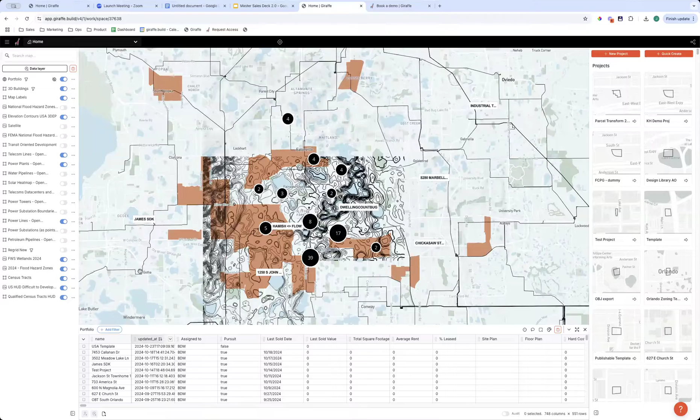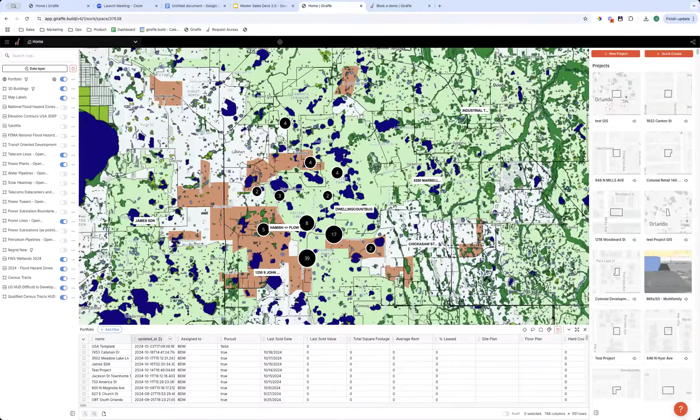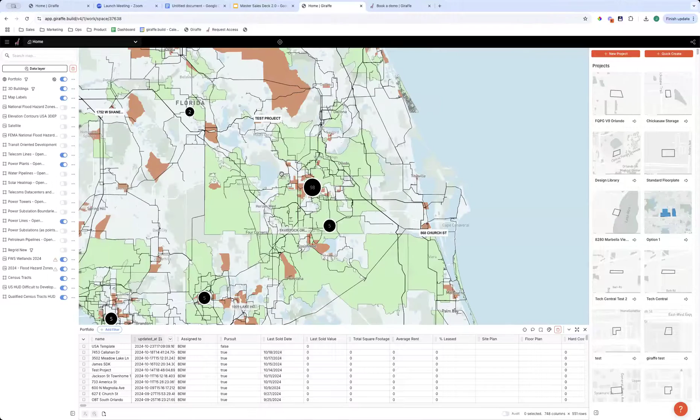And as you look at each of these data sets, they're sort of interesting from different vantage points. So contours at this level, not helpful. Let's get rid of it. But difficult to develop areas from HUD, that is very relevant at quite a zoomed out level. So unlike some other tools that are out there on the market, you want to be able to fluidly zoom in and out of any level. We want to be at the city level, at the country level, at the regional level, at the site level, kind of fluidly. We don't want to have to chop and change between them all. So let's turn some of these off.

Okay, so I just thought I'd point out for those that are in the US, we also work with a nationwide parcel aggregator. Now, this data set is not that relevant for folks that are working with great GIS data sets already, like parcel information for a lot of cities is public data. But it is worth just having a look at because it explains, I think nicely, how powerful the GIS tool sets within Giraffe can be.

So what I've just done there is I've added a layer called Regrid, and then I've focused the lens on that layer. So if you're following along and you want to do something similar on your side, do the same thing to the 3D buildings data set. So zoom in till you can see the 3D buildings, and then click the three dots, open lens control. And you can see now that I've opened lens control on the 3D buildings, the table down here is focused on the buildings data set. And I have columns, and as I hover over different rows, they're giving us some kind of information about what building we're talking about.

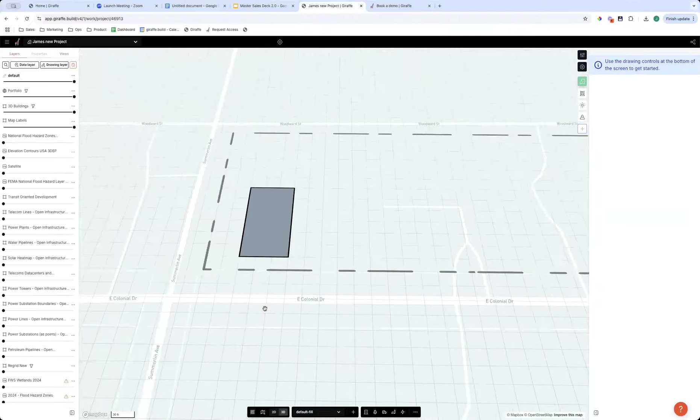Okay, so now we have a rectangle that's drawn to the grid. We like the look of the rectangle, but it's just a rectangle, right? We haven't gotten very far.

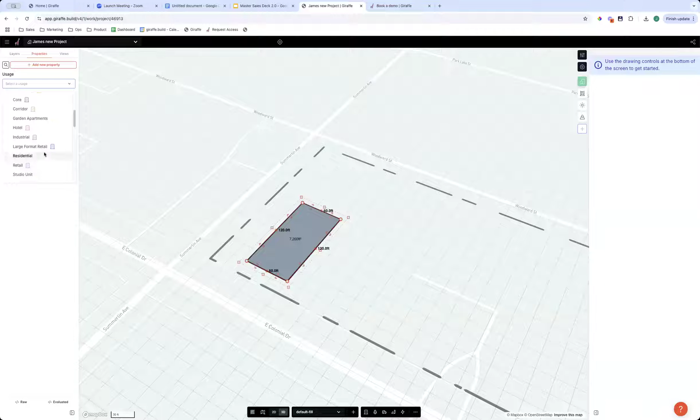So what I may want to do is assign a use. You can see up here on the left-hand side is a usage. Feel free to dig right through them. The residential one is a good place to start. You can see when I assign that residential use, it extrudes directly from the ground. It's a three-dimensional object, and I can now control its height based on number of levels. So that's an easy way to do it.

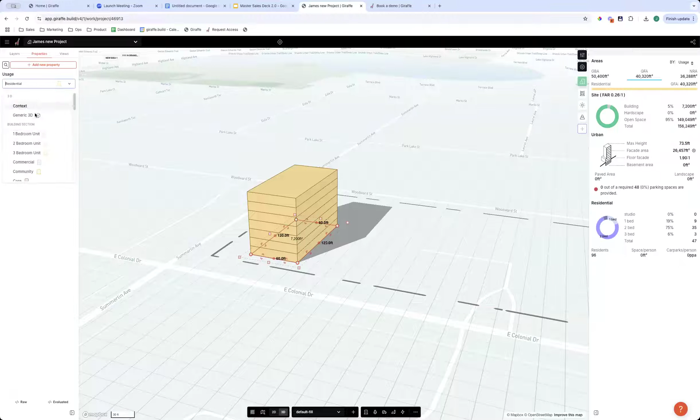And uses, there are all sorts of different uses. For instance, that's a built form type use. But if I'm a land planner, I may want to add a land planning use, in which case we want a different kind of use. We can come back to that as the demo progresses.

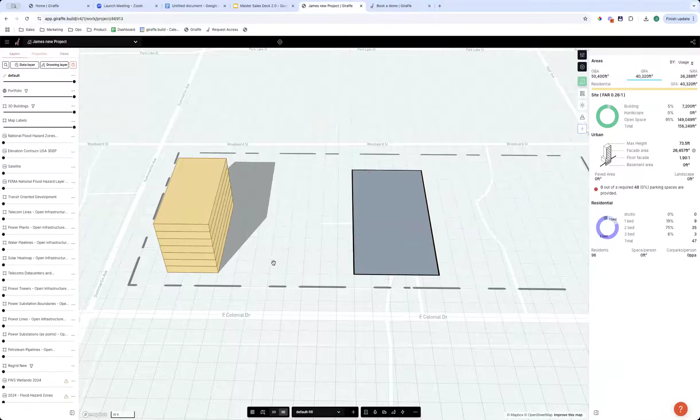Okay, so what's actually happening here? You can see as I've drawn the residential use, I've now got a ton of math on the right-hand side. I have a gross build, so clearly I've drawn with the external wall, the outside of the external wall here. I have gross floor area, so there's a factoring down that's occurring to go from gross build to gross floor. And then there's a net rentable, so there's a third efficiency to take us from gross build to net rentable. FAR is calculating dynamically.

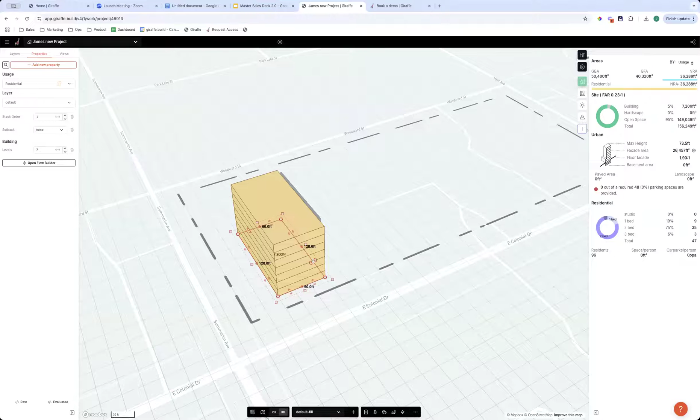We've got all these top level metrics that are really helpful for us being calculated dynamically. And you can watch FAR or max height, for instance, as I grab this polygon and stretch it over the site. That's all dynamic and comes with us.

Okay, so what we want to look at though is where are those assumptions hiding? Who's in control of the assumptions? And the short answer is you are. You want to be in control. Makes way more sense for you to be in control than Giraffe. So every time we talk about a use, it's going to be up here on the top right in the usage table. And this is where we can get crazy.

Think of this like the ingredients panel for your MasterChef recipe. So we're under residential right now, and you can see residential is fairly straightforward. It's a building. It has an efficiency to go from gross to gross floor, and another efficiency to go from gross build to net internal or saleable area, floor to floor, which is giving us these height metrics per level.

And then importantly, it has dwelling calcs. These dwelling calculations, again, are just purely mathematical at this point. There's no visualization, although we will get there, which has the mathematical representation of the dwelling sizes.

So I may boost these up a little bit. Let's say 500 square feet, 650, 750, and 1,000, let's say. And then I want to change the mix so that we actually have some studios. And then I can save. So feel free to play with the usages.

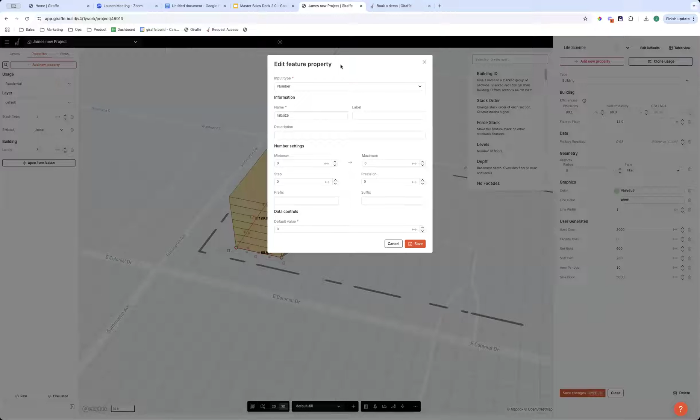And then you can see down here in these other properties, there may be calculations that are important for us to do around a life science building that are not typically considered in a commercial building. This is a very straightforward example, but we may have something like a laboratory size that says, on average, our labs are about 5,000 square feet. So how many labs are we going to fit in this space? So I'm just going to create a new property or attribute, for those that are more familiar with CAD.

And we're going to give it a value. So we'll say here our lab sizes are 6,500 square feet. Okay, I'll just save. So all I've done here is define a parameter.

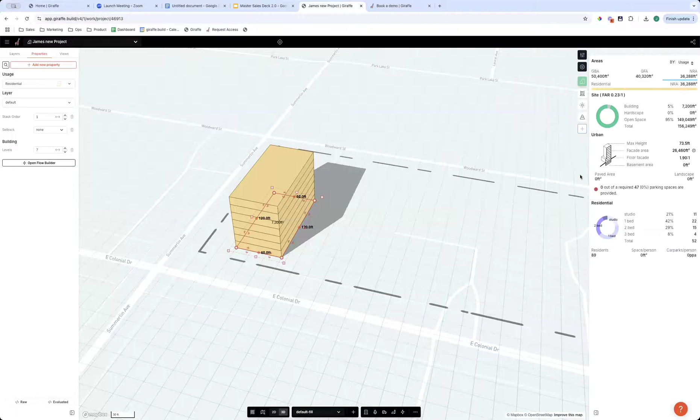Now we're going to move on. The urban tab right now doesn't have any life science allowance. So let's say in this master plan community we're building, we're going to have a few residential buildings.

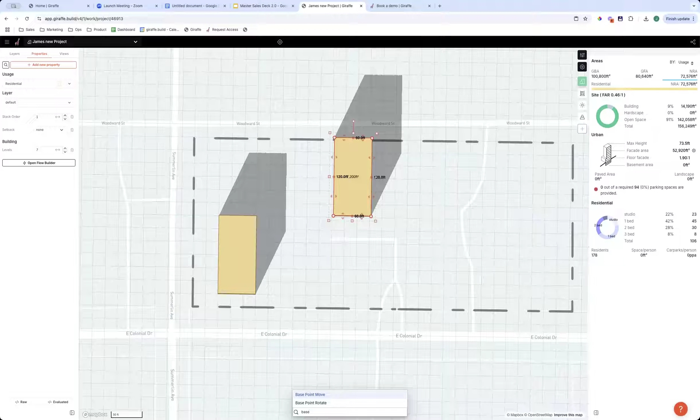And by the way, cheat mode for you guys: spacebar unveils a couple of cheat codes, base point move being my all-time favorite. If you want to base point move an object, you can alt-drag to move it, then spacebar base point move, grab the corner, move it to the corner.

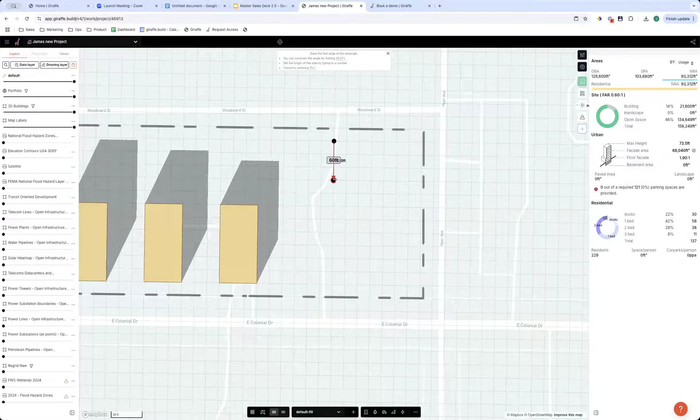You'll have to forgive this horrible master plan I'm coming up with. Let's at least get some variation on the form. And then over here on this side, we're going to do our life science building, which will be sort of a U-shaped complex. 60, 60, 60, 60. I like it.

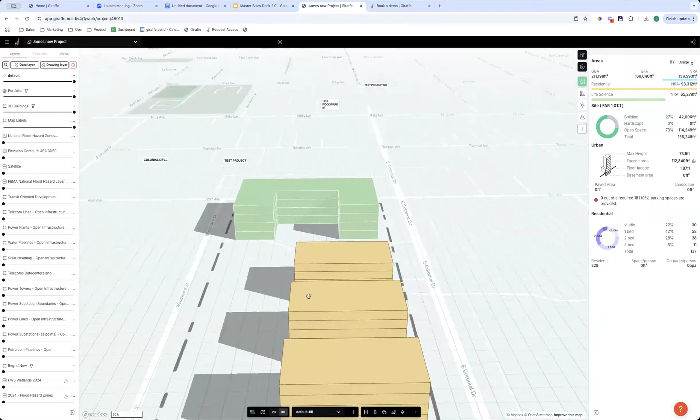So I'm going to take this rectangle and say life science. Now when I assign that life science use, you can see on the right-hand side the math is working for us at a macro scale, but we still don't have any concept of a life science building. So how would we create a calculation that reflects the nuance of the project we've just made?

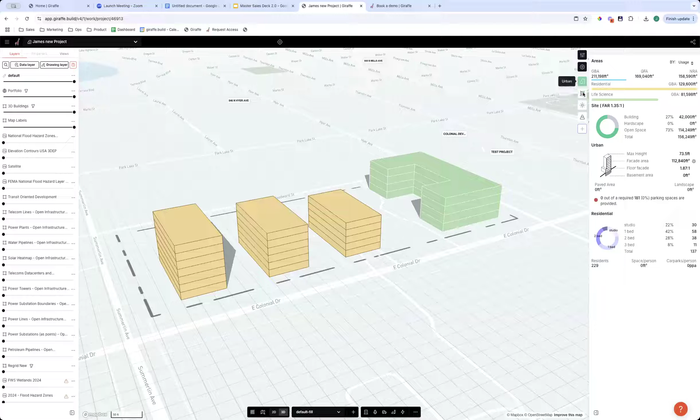The way we would do that is with analytics. Analytics is this second tab here, feel free to hit analytics. We're going to just start with a blank slate, although you're welcome to explore the templates.

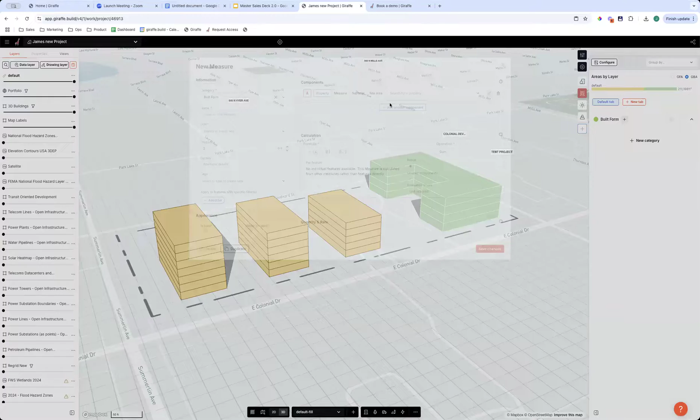I'll create a new calculation here called built form. We're going to add a new calculation that says: go get me the saleable area for every polygon that we've drawn. Each one of those, 1, 2, 3, 4, has a saleable area. Saleable area for the residential buildings is different to the saleable area of the life science building. But that's okay, because our calculation is going to be cognizant of that fact.

You can see when I select the lab size property, there's only one feature that has the lab size property, and that's our life science building. So we'll say to Giraffe: take A, the saleable area of all the objects, and divide it by B, the lab size. The order of operations within Giraffe goes at the object level—do that calculation at the object level, and then sum them all together.

So it will be A over 0, if there's a math error for this building. A over 0, math error for that building. A over 0, math error for that building. However many square feet over 6,500 for that building, and then we'll have just one calculation.

So we'll call this number of labs. And what is it? We're just counting it, so it's unitless. There it is, 10.04. You can see the logic here stepped out.

So the residential building A has no saleable area, no lab size. We get to building 4, the life science building. It has a saleable area of 65,000 square feet, lab size of 6,500. So that's about 10 labs.

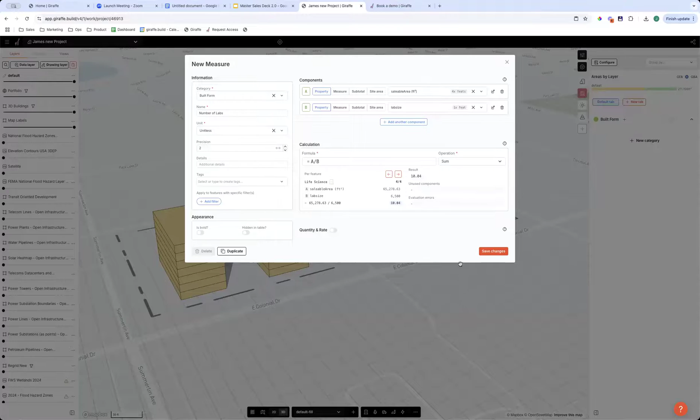Now, is it scientific? Yes. Is it right? Not exactly. And to get this right, we need to now move one layer deeper than just pure math. What we're going to do here is consider the problem a little more deeply.

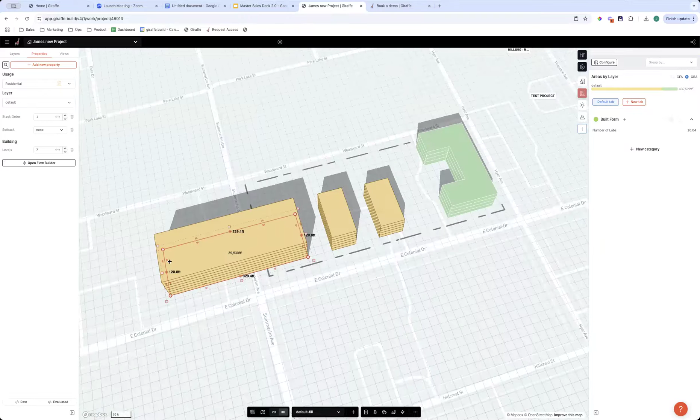So when I say consider the problem deeper, you guys know better than I that sometimes the math in and of itself is not enough to really understand how a lab space may fit in a space, or same with residential. The pure math of the number of dwellings divided by the saleable area divided by the dwelling size is not going to help us, particularly if we draw something that's ludicrous, like a box like that. There's all this space that actually is not going to work within the center.

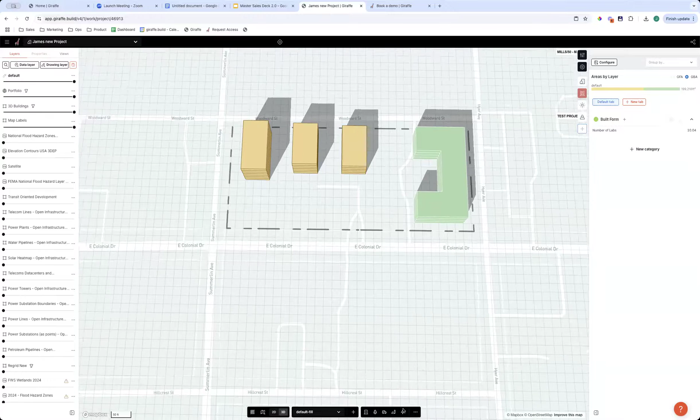So to be more thorough about how we're doing our math, we need to use generative design procedures, or procedural designs is maybe a better way to describe it. So let's open up this fun little part of the tool, the flow features, and let's grab any one of them—it doesn't really matter, whatever looks or feels interesting to you.

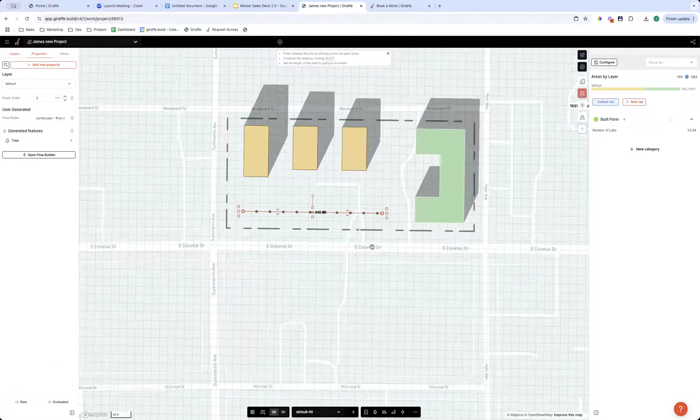I really like this landscape row of trees. Again, I'm going to use the grid and just stretch it all the way across the front. That's going to bring in a beautiful series of trees. Oh, it's a randomized scale.

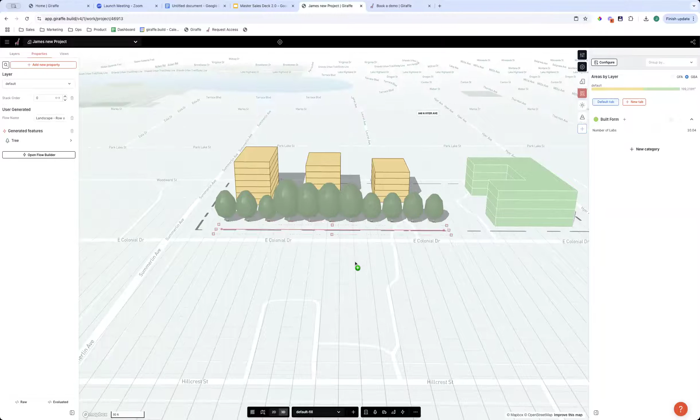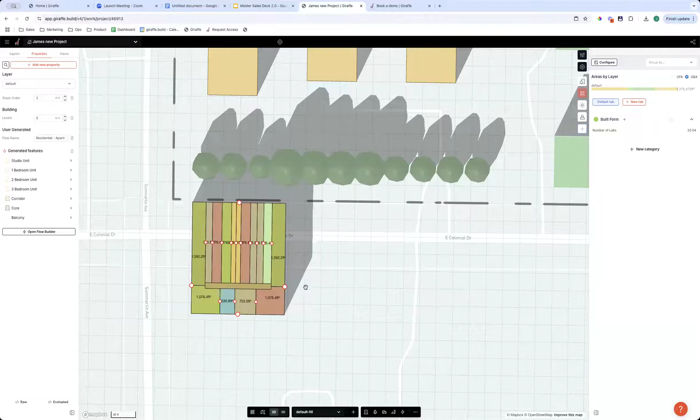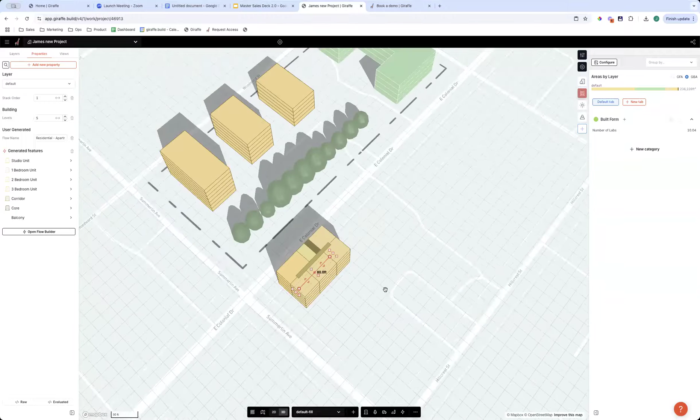The key here is that when we're drawing, sometimes we want to get more granular than just a blob. If we use the apartment algorithm, when we draw, it's going to actually have a floor plan. You can see the corridor, you can see the core, and we can see the issue with having a really wide residential building: either we're going to have long, skinny apartments, or tons of unusable space in the middle because we need light. So how is this working? What is generating this apartment complex?

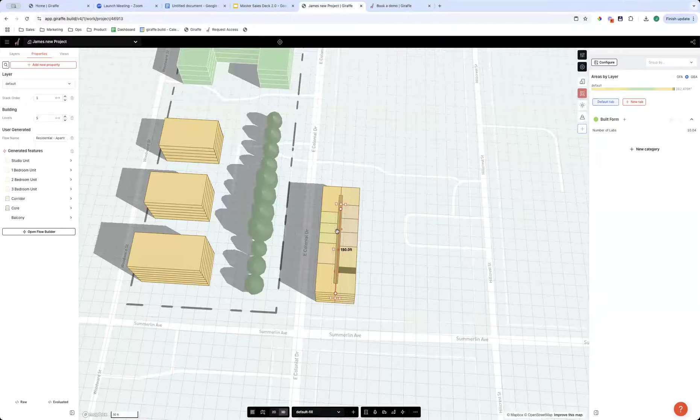You can see all I did was draw a line. And again, if you're lost here, hit the lightning bolt, residential apartments, and just draw a line. All I did was draw a line, but what Giraffe did is it generated polygons either side of that line and then assigned a use to those polygons. In this case, the use was more granular than residential - it was studio, 1, 2, 3, corridor, core, balcony. There are no balconies, so they're not present at the moment. And all the rules it used to assign those polygons are available for us to investigate.

So just to show you how I did that: clicked on the building I'm interested in, and then any one of these generated features, I can click to see the lineage of transformations that produce them. Heading back here, generated features, studio 1, 2 - it doesn't matter which one. The output's a studio unit, but what created it? Well, what created it was the apartment algorithm. And that's the same for all of these. What created it? The apartment algorithm. And now I have the chance to play with design rules instead of just pure math rules.

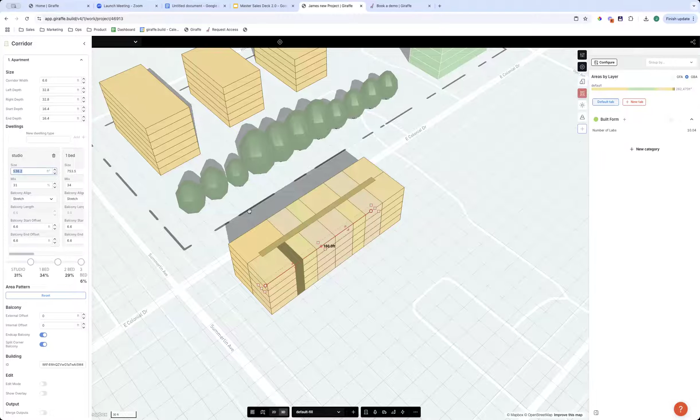You can see as I change the mix, I'm actually changing the polygon output of the algorithm. And there are also the same kind of controls we had over here on the just mathematical expression, but these now relate to physical space. So for instance, if we want to set a fixed depth to the building and a fixed area to the dwelling, then we will actually have a fixed frontage as well, because rectangles are rectangles.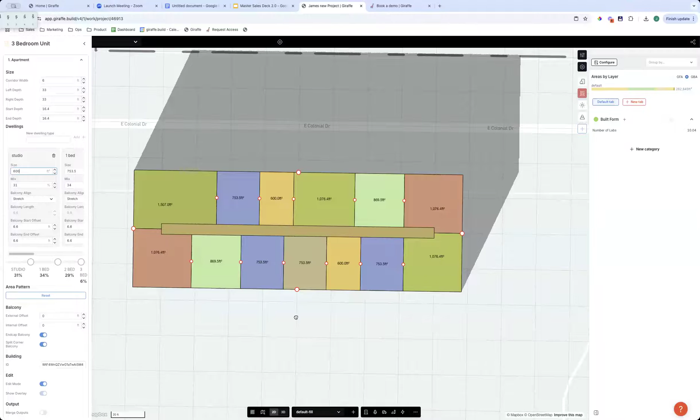So let's say we want a corridor width of 6 feet, an apartment depth of 30 feet - so half the depth of the corridor plus the internal walls. And then I want a studio size of 600 feet. So now what we're generating is a perfect 600-foot studio apartment that is 30 feet deep and therefore consequently 20 feet wide, right? Yes, correct - basic math. James is alert.

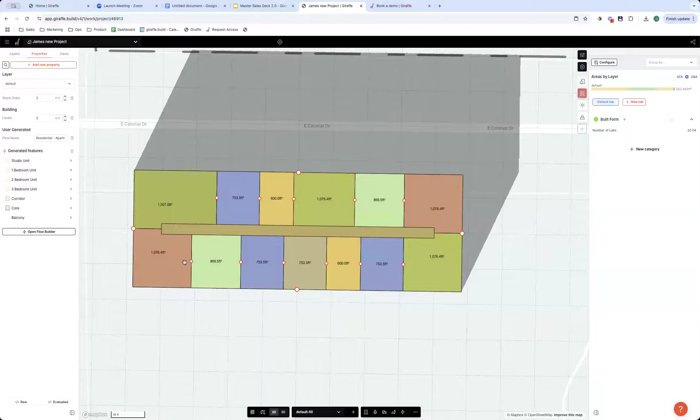So how you figure that out, or how you go and investigate what the algorithm is drawing, is you hit Shift A on your keyboard, and Shift A will take you into this deep view of the algorithm. Typically I don't go this far on a Giraffe 101 call, but I really like to show the lineage of transformations, because that means we can start to understand any generative procedure in Giraffe.

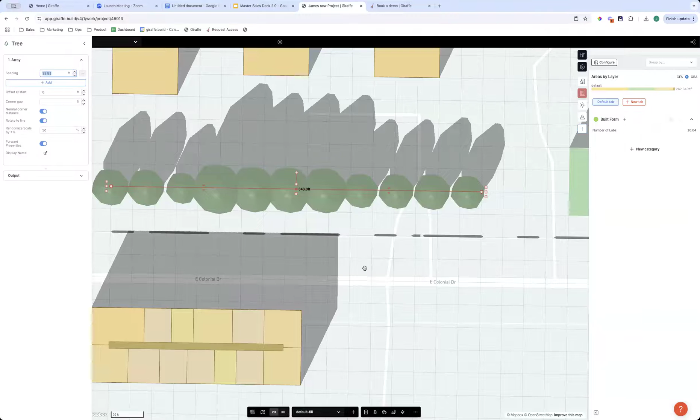So the tree line, for instance - let's look at the generated features of a tree and see what's producing it. It's an array that is spaced every 32 feet and randomized to scale at 50%. So if we go back to 3D mode and change the array spacing to every 60 feet, and want them all to be the same size, all I do is change those parameters. Or I can experiment by visually seeing what would happen if we lowered that down - what if we put this to 100%?

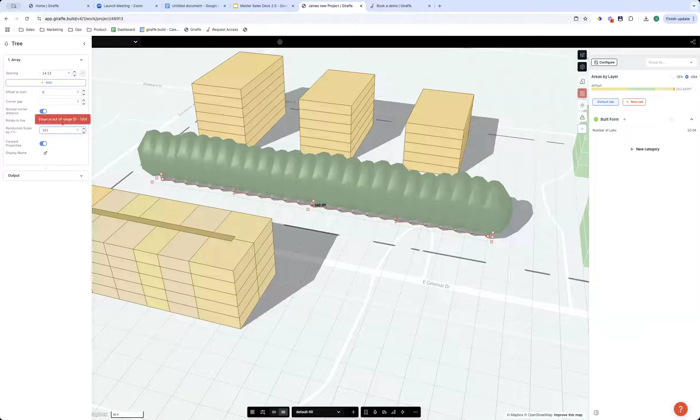So the generative design tools are not there to replace a designer's thinking - they're there to enhance a designer's thinking. And these two examples are really good examples of that.

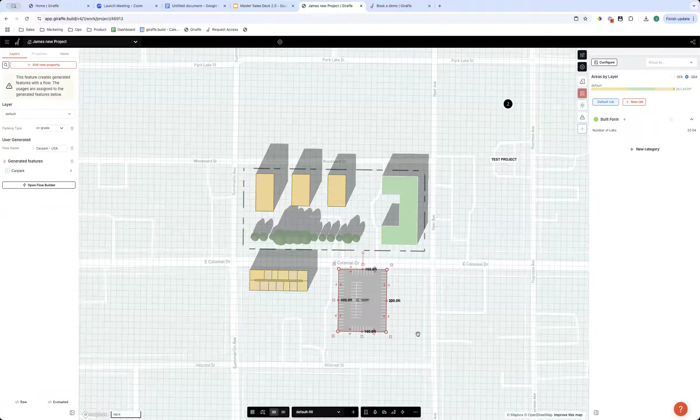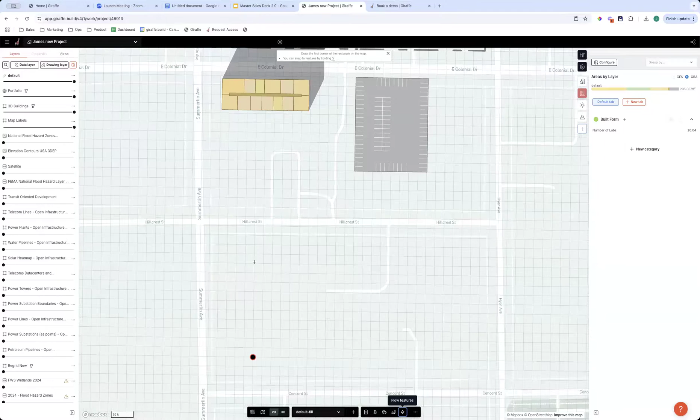As we then start blowing that up into more complicated use cases, like a car park, which runs on its own set of assumptions and algorithms, or something really complicated like an industrial building - and actually industrial buildings are not that complicated, but this is a complicated flow - I'm going to just say, go get me the whole procedure here, and you can see the procedure is actually really cool. It has parking either side, a truck court either side, and trailer parking either side, down to the detail of having dock doors.

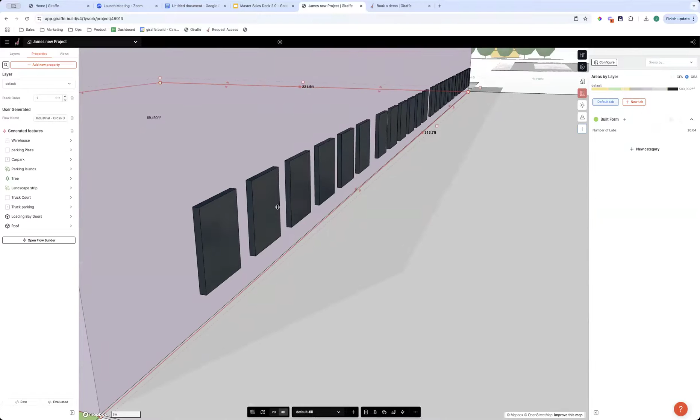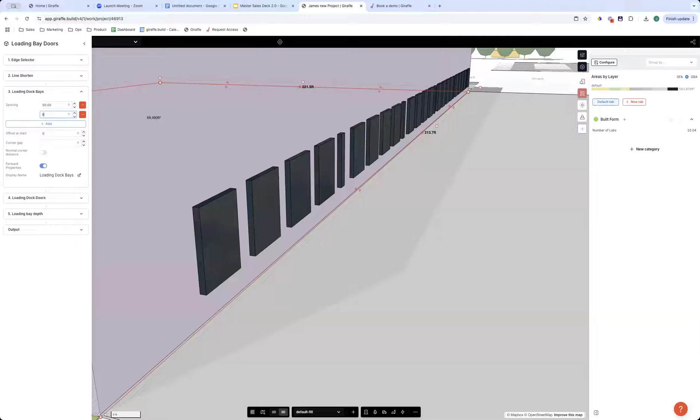If we want to change the spacing of the dock doors, we go to generated features, loading bay doors. What's producing those loading bay doors? Well, there's a whole heap of transformations happening. Let's go up to the original setting, which is the spacing, and maybe we'll shorten this to 50 feet - and you can see now they're in groups of 4 as opposed to groups of 5. Spacing between them, maybe we want closer to 20 feet, and it shoves it out 20 feet. So a very fun, fluid type of interaction to figure out what's generating things within Giraffe.

I again will stop for questions, and then we might wrap it up with just a quick summary. So does anyone have questions they want to ask? Oh, I see a chat. Nope, that's you, Ollie. Are there any deeper flows or deeper questions that people would like to see in the time we have left? Feel free also to raise your hand and I can unmute you if you'd like to ask live instead of typing in the chat, whatever you're most comfortable with.

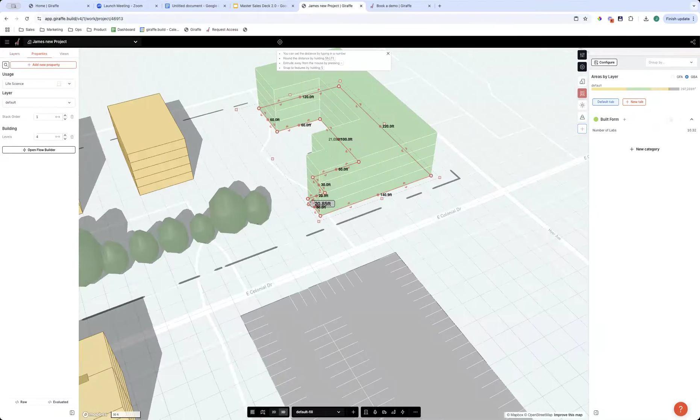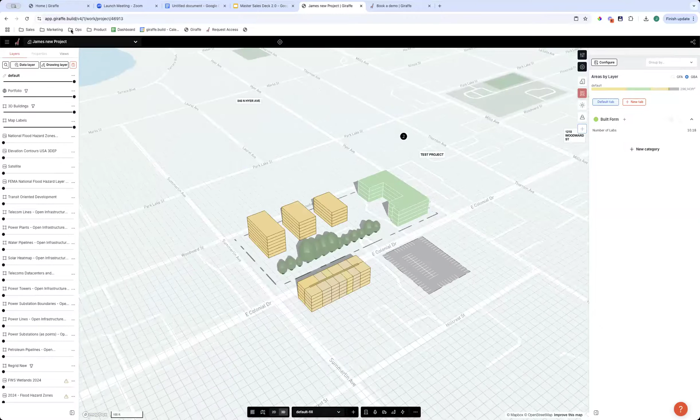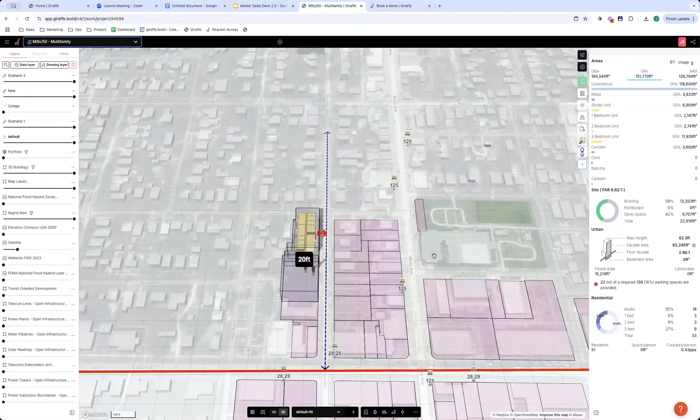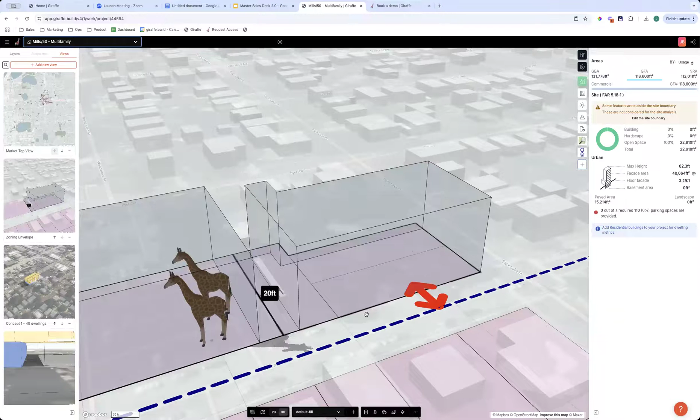Maybe I'll just show a few quick examples and then we will wrap it up. So here's a cool example of a feasibility study. You can see this study is taking the same concepts of just drawing things and working with GIS, but it's a lot more comprehensive. It's been driven to completion. So if I go to the Views tab, you can see I can actually tell a story with the polygons and with the layers. So I click this story here and I can see, okay, here are the other parcels zoned AC1. When I then dive in to the next step, it's dropped the design out, but I've got the zoning envelope coming in beautifully with some nice annotations so I can understand what that's all about.

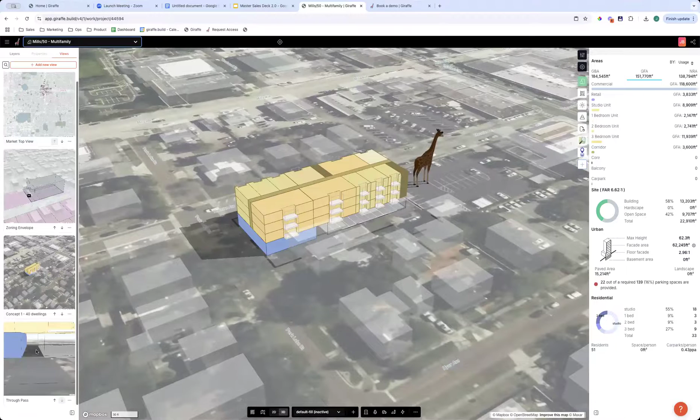Then I've got another storyboard that's showing me the actual design concept that's functional within the zoning envelope. And then maybe something even more detailed like a street view, if that's relevant for what you're looking at. Clicking on analytics here, you can see the way we've done analytics is more of an investment pro forma, looking at hard costs versus net operating income.

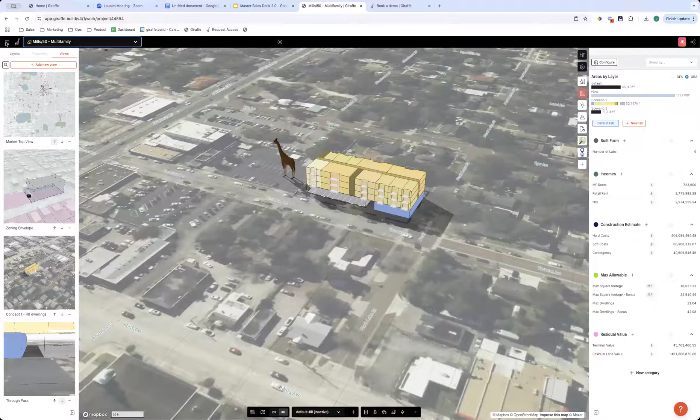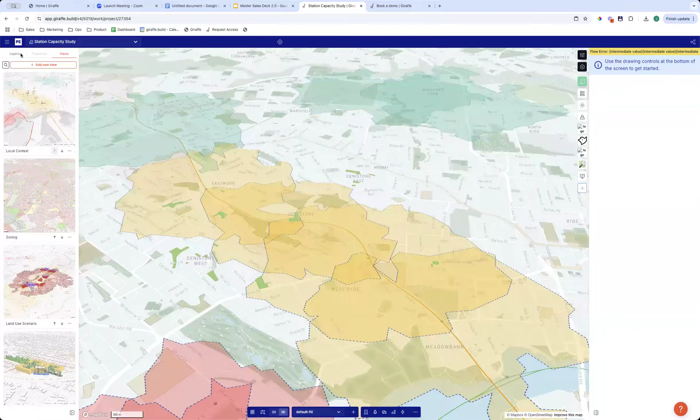One more example for the planners on the call, we switch over to a station capacity study or a transit-oriented development study. And do that real quick. Go to station capacity study. And I love this project. This is a project with many layers. And these catchments are either drawn or coming from the GIS. Yeah, let's go back over here, drawing layers. Let's reload this. I was working on this morning.

And this is using the basic tool sets of Giraffe, but at a land use level as opposed to at a built form level. So you can see when I'm considering land use here, instead of operating at the individual parcel level, I'm saying let's operate at the total land use level, so the whole super polygon. And the assumptions driving this polygon, instead of them being efficiencies and floor to floor, it's a maximum height, floor space ratio, a site coverage ratio, and an average dwelling size.

So then when I perform a calculation, like what's the, as per code, maximum residential area allowed in this zone, you can see it is a simple calculation. It's just go get the area of the polygon and multiply it by the allowable FSR. Very simple. That's the maximum theoretical limit. And if you want to go one step deeper, which then looks at site coverage, ratios, etc., then you could either build a generative flow to do that or a mathematical expression or both.